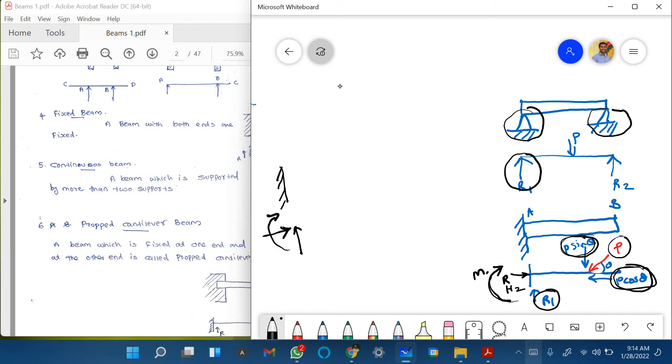Okay, another type of support is the hinged support. This one is a hinged support. So in case of hinged support, what are the reactions? Actually the reaction is offered by a support against the movement - free movement is possible and there is no reaction in that direction.

For example, if a vertical force is applied, the vertical motion is arrested by the support, so there will be a vertical reaction. But here, when we apply a load P, this fixed end restricts the movement in the horizontal direction, vertical direction, and it resists the rotation also. So that is why in the fixed end there are three reactions.

Like that, here in the hinged end - this is a hinged end. In case of a hinged end, this hinged end resists the vertical motion, as well as the horizontal motion also resisted by the hinge. But this hinge allows rotation - we know like a door's hinge, we can rotate it. So here there will be a vertical reaction R1, horizontal reaction RH1, but there is no moment resistance offered by the hinged support.

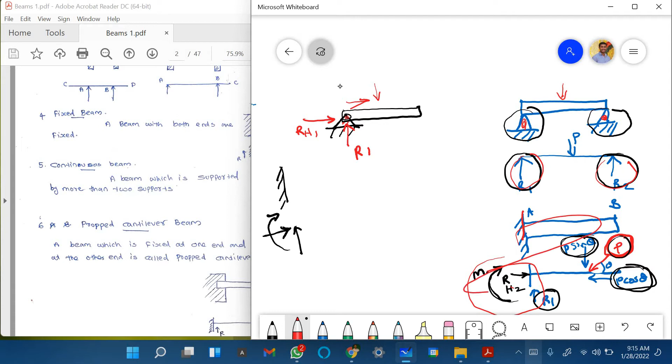Okay, so these are the main types of beams and their support conditions, which I already explained in the last live class. So the next one is different types of loads acting on the member.

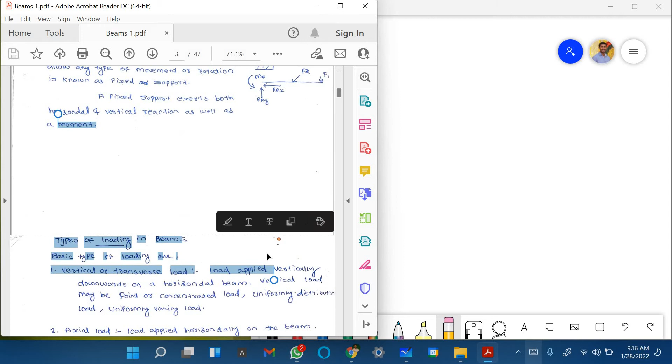Okay, so basically there are two types of loads acting on the beam member. Can you see this on the screen?

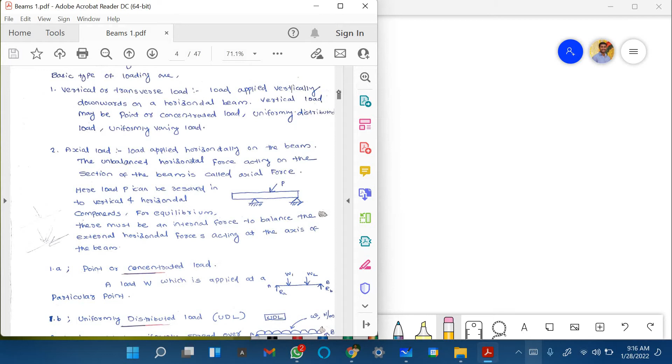There are two types of load commonly acting on the beam member. The first one is the vertical load or transverse load. For example, consider this beam.

This is a beam and this one is a column. The vertical member is a column.

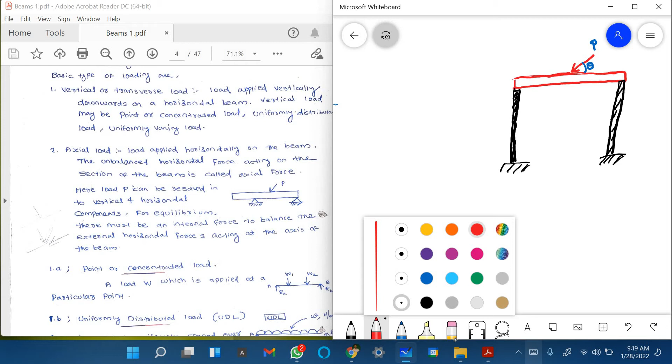First one is P sin theta. Second one, this horizontal component, is P cos theta.

So here we can see this P cos theta is a horizontal force. So the beam is also designed to resist the horizontal force, but the major resistance offered by the beam is against the vertical load.

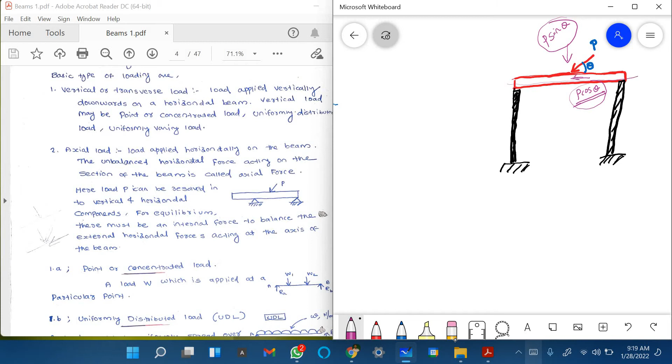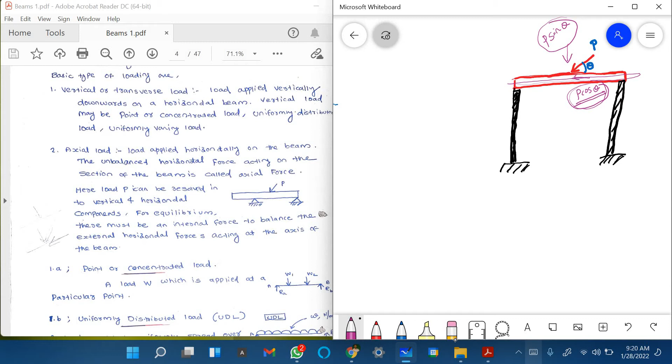But sometimes this P cos theta may also develop on the beam, so we should also design the beam against this P cos theta. So that is the two loads acting on the beam: the first one is the vertical load or transverse load, and the second one is the axial load or horizontal load.

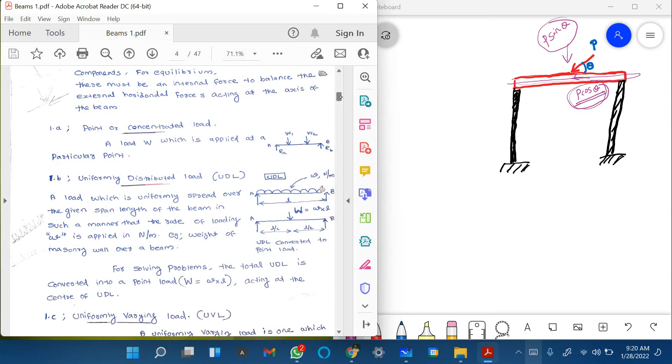But our scope of study or design of beams is limited to the vertical load because that is the main load acting on the beam. Next, the different types of loads acting on the beam - the first one is the point load.

This is a beam, this is a simply supported beam, like a column and a beam. Here a load is acting on this member, P.

Here we can see a P load is acting on this beam at point A. At point A, load P is acting.

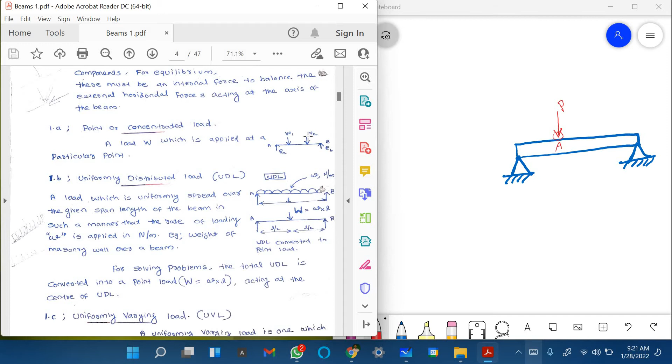See this figure. In this figure we can see the point loads W1 and W2 acting. So here for the point load corresponding to point load P, there will be some reaction: this is R1, and here in support 2 there is reaction R2. So this first one is the point load.

Point load. Any doubt in this? Point load, okay.

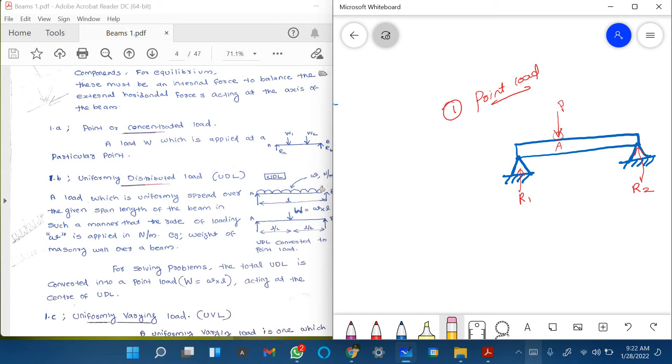The second load is called a uniformly distributed load. In short, we can call it UDL, uniformly distributed load.

For example, in case of a building, sometimes we construct a beam, and for example this is a column or wall of the building. Over the wall we construct a beam, and over the beam sometimes we construct another wall. For example, this is another wall constructed over the beam.

So here in this case, the load offered by the wall is uniformly distributed throughout the beam, isn't that right?

The load offered by this wall is uniformly distributed over the beam. So we can draw the beam and see this is the load distribution throughout the beam. The same load is acting everywhere. This type of loading is called a uniformly distributed load.

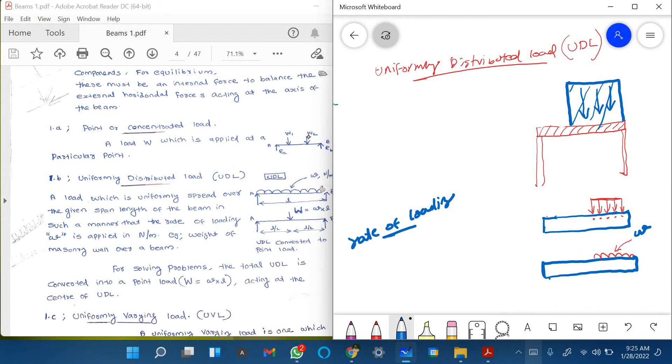The uniformly distributed load is represented like a rate of loading, small w. What is rate of loading? Rate of loading, small w, is nothing but the amount of load acting per unit length. That is the weight or load per unit length. So that is the rate of loading.

We represent the uniformly distributed load in terms of this rate of loading. What is the unit of this? Newton per meter is the unit of rate of loading. For example, the total length of the beam is equal to 5 meter, and the uniformly distributed load is distributed only over 3 meter out of 5. The rate of loading, for example, is equal to 5 Newton per meter.

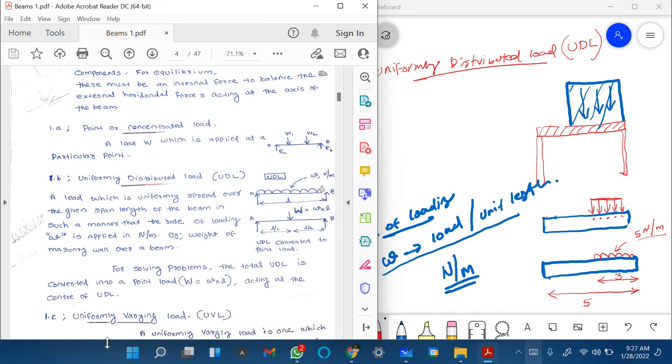Then what is the total load acting on this beam? The rate of loading is equal to 5 Newton per meter. So here the UDL is distributed over 3 meter, so the total will be 5 into 3, which is 15 Newton.

So total load, capital W, equal to small w into the length of distribution. Here it is 5 Newton per meter into the total distribution length, that is equal to 50... I mean 15 Newton. We represent this loading on the UDL in terms of rate of loading small w, and capital W equal to small w into L. Here L is not the length of the beam, L is the length of distribution. Here it's 3 meter, since UDL is distributed over 3 meter. That is about uniformly distributed load.

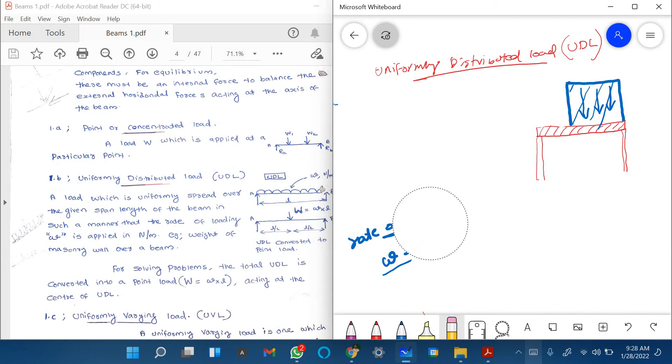In case of uniformly distributed load, for calculating the shear force and bending moment diagram, we convert the uniformly distributed load into a point load, for simplification of the problem. For example, here there is a UDL with 5 Newton per meter, and the length of the beam is equal to 5 meter.

Out of the 5 meter, this length is equal to 3 meter. So when we do problems with the uniformly distributed load, we need to convert this UDL into a point load, then only we can simplify the problem. How can we convert it? So here we can convert this UDL.

Actually, what does the uniformly distributed load mean? Here I draw another figure of this same UDL. Everywhere the force or load acting will be same. So we convert this UDL into a point load.

So how is this UDL converted into a point load or equivalent point load? This UDL can be converted into a point load, and this is the point load. What is the value of this point load? Anyone? What is the value of this point load?

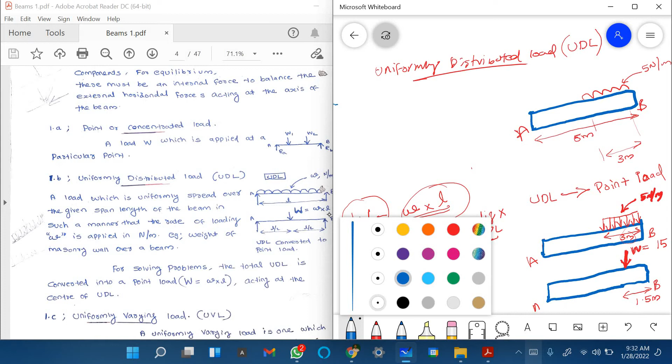That means half of this 3 meter. So the point load will be acting at the center of gravity of this rectangle. Here we can construct a rectangle. This is a rectangle. And the magnitude of this point load will be the area of this rectangle.

Area of this rectangle. Because this 5 Newton per meter is actually the height of this rectangle. The width of this rectangle is 3 meter. So 5 into 3, 15.

That 15 is the magnitude of the point load. And the location of the point load will be at the center of gravity of this rectangle, wherever that is, that is the location of the point load. So the center of gravity will be at the center, that means in between 3 meter, at the half of 3 meter. That means this distance is equal to 1.5 meter.

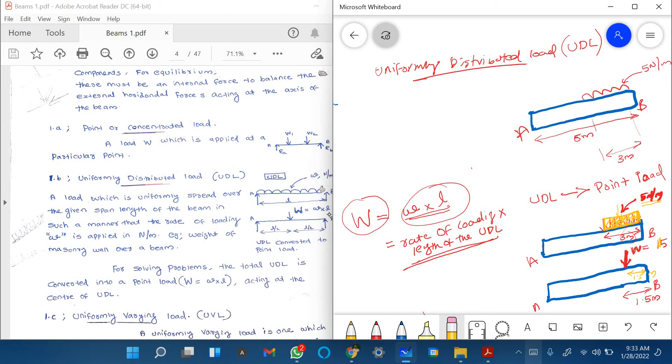Any doubt? This is very important while drawing the shear force and bending moment diagram. You need to convert a UDL into a point load, then only after that you can proceed with the problem. So first to convert this UDL into a point load, the magnitude of the point load will be equal to the rate of loading into length of the UDL, and the location of the point load will be at the center of gravity of this rectangle, or half of the distance of the UDL.

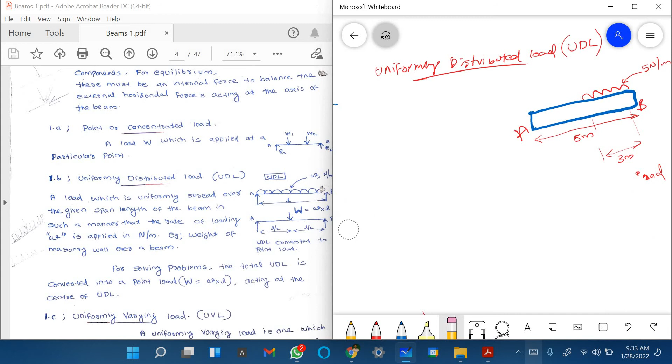3 meter. So from B it is 1.5 meter. Any doubt? No, sir.

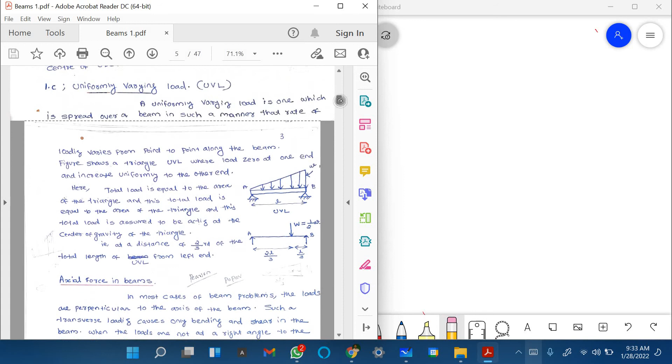Next one is UVL, uniformly varying load. Uniformly varying load. You have studied this already, right?

Okay, UVL. So in case of UVL, the same similar concept can be used here also. So this is a beam, AB. And here at this point C, the magnitude of load is equal to 0. Then the magnitude is increasing uniformly from point C and is increasing up to point D.

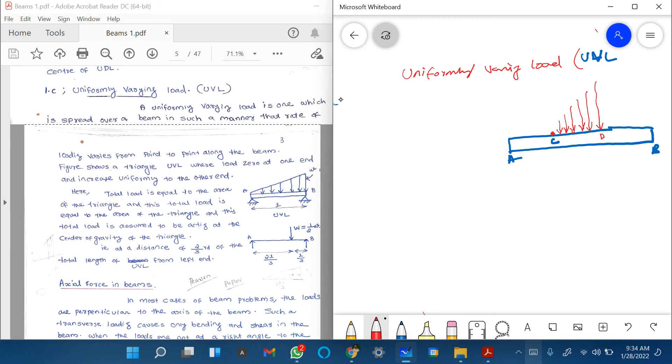How would a non-uniform increase look? For example, how would this be? This is non-uniform increase, a curve would connect it here. This is non-uniform increase, so this is not in our scope.

So this is a uniformly varying load, see this is a straight line. So in this uniformly varying load also we have rate of loading small w, in Newton per meter.

And for example, we can give the rate of loading as 5 here, 5 Newton per meter, that is the rate of loading on this UVL. And for example here the total length is equal to 6 meter, this length is 3 meter, 4 meter.

Again, for doing the problem with the UVL also, we need to convert UVL into a point load. So this is point A, B, point C, point D. I convert this UVL into a point load, and this is my point load. What will be the magnitude of this point load?

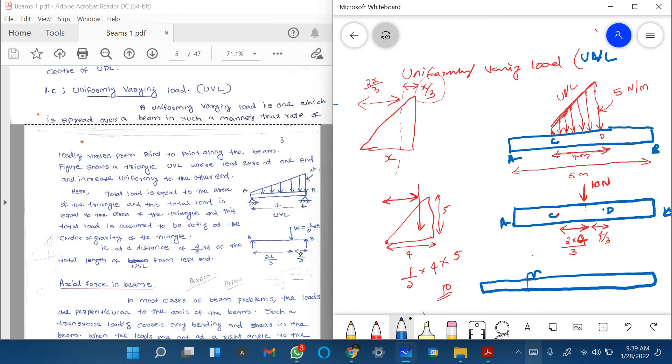Any doubt? So in your shear force diagram problems, for example, your problem will be like this: a beam with a UDL, a point load, a UVL - maybe a point load in between the UDL. So this type of problem will be asked in your university exams.

So here you need to convert this UVL into a point load, UDL into a point load. Then only you can proceed to draw the shear force and bending moment diagram. So study this, it's very important. If you have any doubts, please ask.